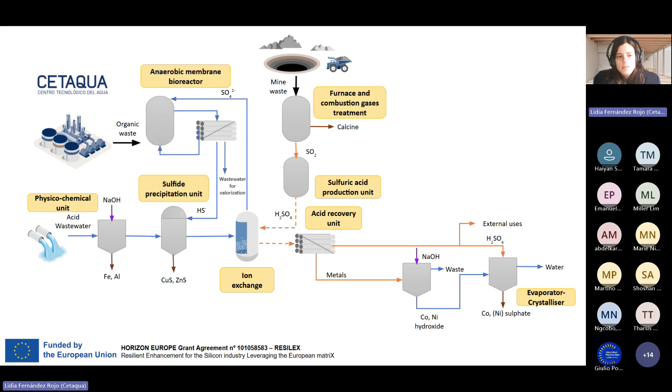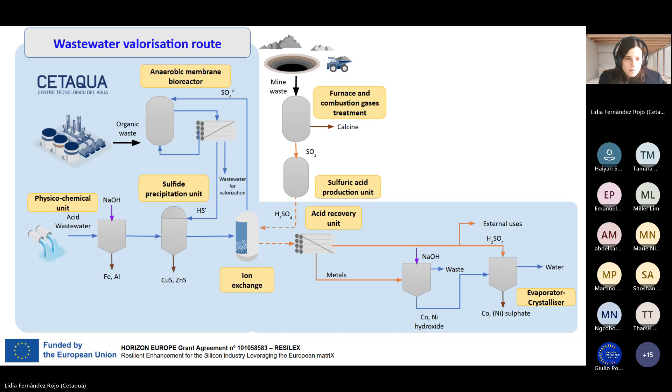So here I will first explain the innovative circular treatment train. This is the whole treatment train where we treat from one side acid wastewater and from the other side mine waste. But in my presentation, I will focus on the wastewater valorization route that is composed of 6 different units. I will go one unit at a time, reviewing the main results of each one. And then Tharsis Mining will explain the main results on their 2 units for valorizing the mining waste.

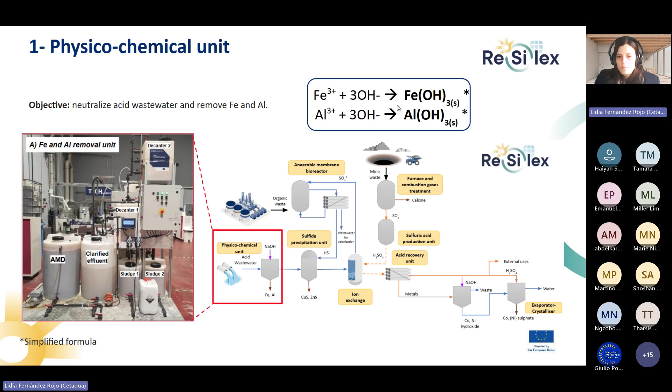And the water we treat in that case, as you can see, exhibits an acid pH, has a high sulfate content, on average 40 grams per liter, also high iron and aluminum content, so iron about 2 grams, aluminum about 0.4, that we remove in that step, and also has valuable compounds like zinc, copper, cobalt, and nickel that we will recover through the whole treatment train.

So in this first step, what we did is that we wanted to optimize the iron and aluminum removal while avoiding the co-precipitation of other metals like cobalt, nickel, copper, and zinc. So we did first pre-commissioning studies in the lab, and we determined the optimal pH for that, and it was 4.5. Also, we did tests with the pilot before starting the treatment of the whole water, and we determined that the optimal residence time would be 2.2 hours.

In the whole operation, what we achieved is an average of more than 99% and 85% iron and aluminum removal at pH 4.5. However, we observed an undesired removal of copper in the sludge, and a minimal removal of cobalt, nickel, and zinc, which was good news since we wanted them to remain in solution.

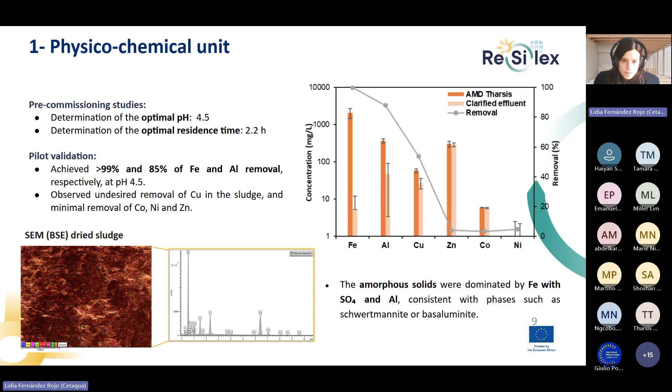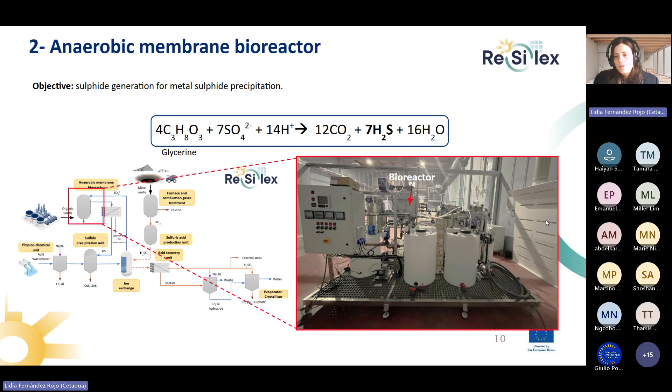You can see here the pilot. It was a compact pilot with other units inside that I will explain later on. For the results, we operated the pilot successfully for 260 days in 4 different phases, where we modified the chemical oxygen demand and sulfate ratios.

The first phase consisted of the culture enrichment, where we worked in batch with a synthetic inlet water. Then in phase 2, we worked in continuous mode with synthetic inlet water. Then for phase 3, we worked in a circular treatment loop, which means that we were using as inlet sulfate the same sulfates that are contained in the acidic mining waters from Tharsis. They are not synthetic anymore. And then in phase 4, we treated synthetic inlet again, but with higher sulfate concentrations.

So we achieved on average, I would say, 70% sulfate removal, but we reached up to 95% in phase 2. We measured a maximum dissolved sulfide of 300 milligrams per liter in phase 3 and removal rates up to 4.7 grams per liter per day, with an average of 1.4 grams per liter per day for the whole operation.

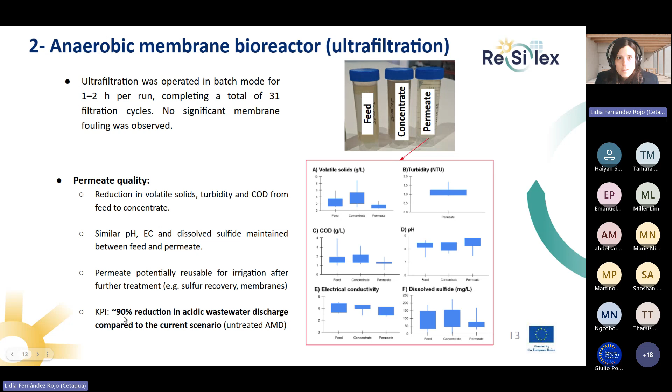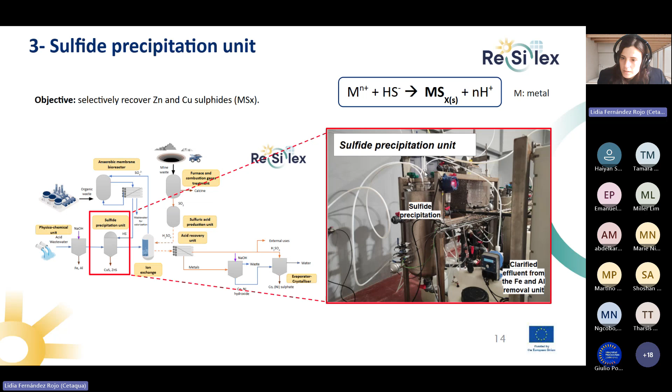We performed different tests at different hydraulic retention times, different pH and different sulfide concentrations. We know these reactions are fast; they are not kinetically controlled. But we tested hydraulic retention time because it has an effect on the mixing of the two solutions in the reactor. So in the end, the hydraulic retention time and the mixing effectiveness have an effect.

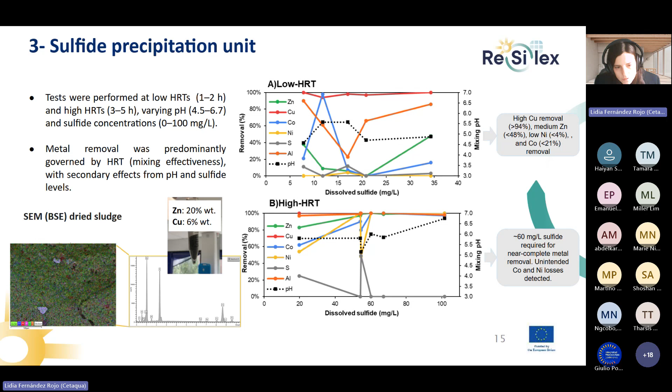If we want to work further on that, probably we will need to work with a high hydraulic retention time, but with a higher sulfide dose and keeping the pH about 5. We also analyzed the sludge from here, and on average it contained about 20% of zinc and 6% of copper in the form of sulfides.

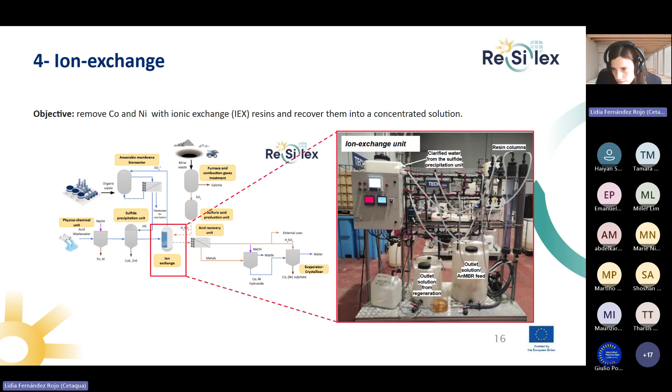The outlet of this sulfide precipitation unit went to the ion exchange, where the ion exchange resins preferentially retain cobalt and nickel. The objective was to recover them afterwards with sulfuric acid in a concentrated solution. Here you can have a look at the pilot we used for that, and here you can see the resins that we used.

Each operation cycle is formed by 3 steps. First, there is the metal retention, where you treat the water and metals are retained onto the resins. Then there is the pre-elution, where you remove hardness, for example calcium and magnesium retained on these resins. And then you do the final elution with a concentrated acid to recover cobalt and nickel.

Here you can see the results of 2 of the experiments. So in all of the cases, we retain more than 90%, 95% of cobalt and nickel. However, we did not reach the saturation in any of the cases. And what we observed is that with the employed resins, we achieved 2.2 milligrams of cobalt and 0.9 milligrams of nickel per gram of resin.

And we also see that there was retention of other metals here, zinc, iron, and copper, that were probably not efficiently removed in the previous steps. So they were competing for the retention on these materials here.

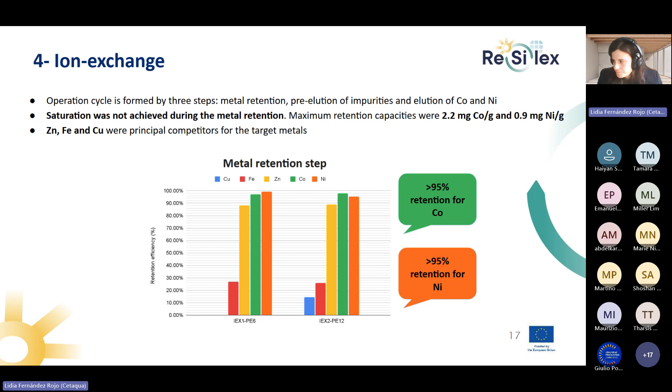And then the next steps were the elution experiments, where we work with different pre-elution volumes, 6 to 12, one bed volume corresponding to 0.5 liter, and different acid sources. So we tried either commercial acid or acid from Tharsis Mining. You can see here the elution efficiency and the recovery of cobalt and nickel.

So what we observe is that once we work with longer pre-elution steps, with 12 bed volumes, it decreases impurities in the final elution solution, because we remove calcium and magnesium before, but it also increases cobalt and nickel losses. This is why the recovery of cobalt and nickel here is lower than in the experiment on the left, where we work only with 6 bed volumes of pre-elution.

Here in these 2 experiments, we reach between 97 to 80% recovery of cobalt, and we concentrate cobalt about 80 to 87 times, and we obtain a final solution with 0.2 grams per liter of cobalt and almost 0.1 grams per liter of nickel in the eluate.

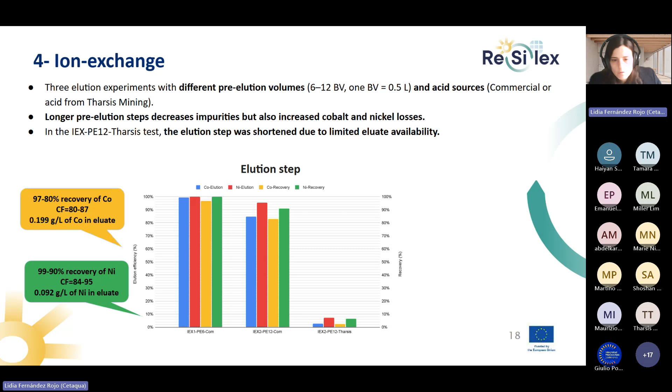Then the next step is the acid recovery unit, which consists of a nanofiltration. So the eluate from the ion exchange goes to this membrane, and here the objective is to concentrate cobalt and nickel in the concentrate stream from the nanofiltration and recover sulfuric acid in the permeate, because keep in mind that this exhibits an acid pH below 1, and under these conditions, sulfuric acid is in the form of bisulfate, which has 1 negative charge.

So it is not rejected by the nanofiltration membrane, so it can permeate. And this is the way we can recover sulfuric acid in the permeate. And the membranes employed here are special for supporting acidic pH.

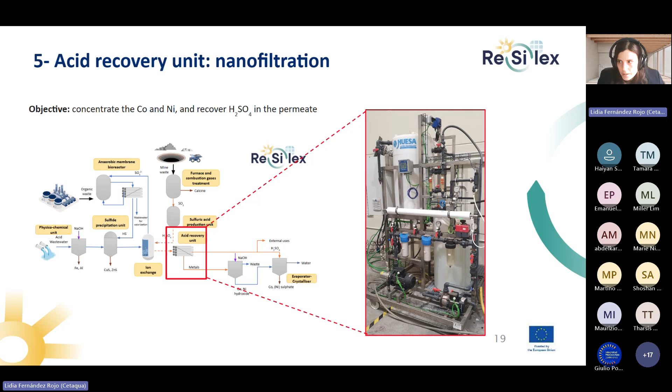Here we operated with synthetic solutions because the amount required for this pilot, as you can see, was kind of medium, so it required 200 liters for working, and from the elution of the previous step we recovered 3 liters instead of 200. So we work with synthetic solutions, and each run had a duration of 2.5 hours.

And here you can have a look at the cobalt and nickel concentration factors and concentrations in the beginning, so in the feed and in the concentrate. And of course, in the permeate, we cannot see them because all the cobalt and nickel went to the concentrate. So at the end, we increase the concentrations ninefold for cobalt and nickel.

And sulfur, which is not here because it was out of range for this plot. So what we saw is that it largely permeates as bisulfate, and we recover sulfuric acid at a concentration of about 0.9 molar that was suitable for reuse for other purposes.

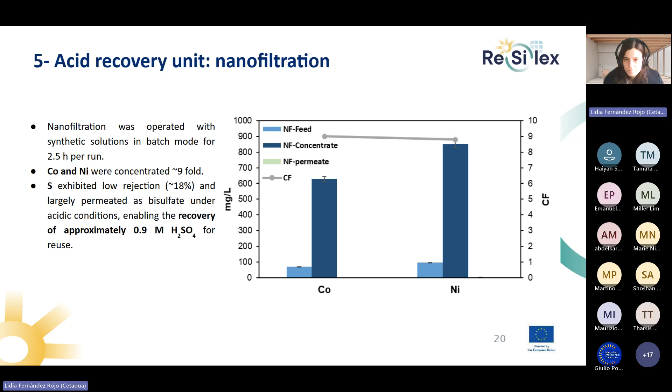And then the last step of the wastewater valorization route consists of an evaporator crystallizer. And the objective is to concentrate cobalt and nickel and recover the metals in the form of crystals. Here you can have a look at the setup. So first we work with addition of caustic soda to first concentrate the metals as hydroxide, then redissolve them with sulfuric acid, and then it went to a rotary evaporator.

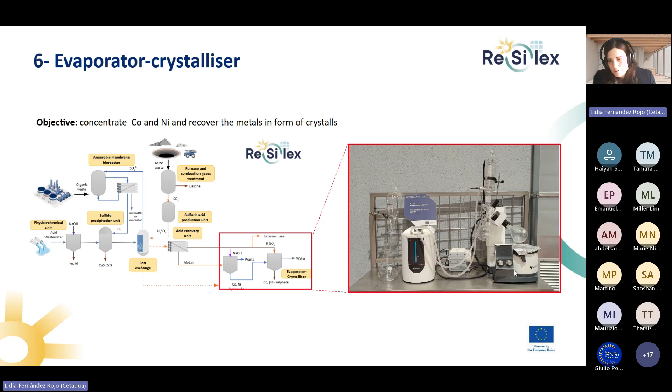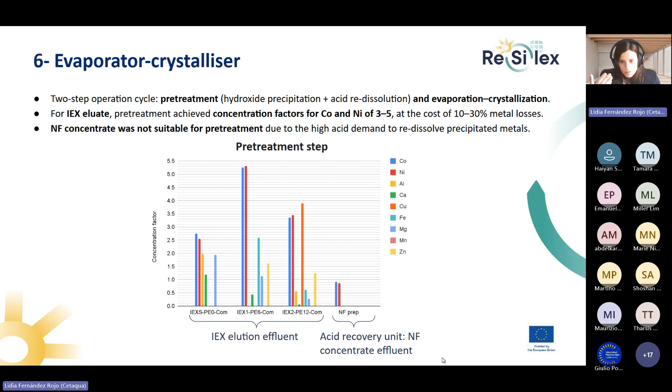And when we work with the nanofiltration, since this solution is already very concentrated, when we try to concentrate even further with the hydroxide precipitation, we did not manage to reduce the volume of the hydroxide sludge that is formed. So at the end, the concentration factor is lower than 1. It means we lose some of the valuable metals there. So if we are using this acid recovery unit, it makes no sense to employ this pretreatment. You have to go directly to the evaporation crystallization step.

And here we can show the results of the final sludge. With the nanofiltration concentrate without pretreatment, here where you can see my arrow, we reach a higher cobalt and nickel recovery, and we obtain a crystal with almost 18% of cobalt and almost 6% of nickel in the crystals, which were in the form of cobalt and nickel sulfates, different hydrated sulfates.

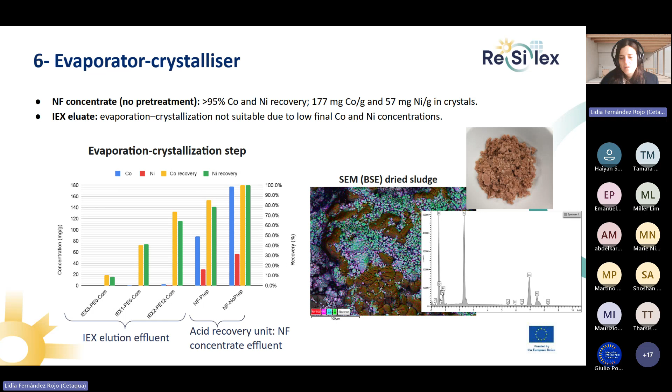And then when we use the ion exchange elution effluent, what we saw is that cobalt and nickel concentrations are much, much lower because they were not concentrated enough for these steps. So at the end, we did not obtain a valuable crystal. From this, we thought that it is important to use the acid recovery unit, so not to skip that point, because it is really helpful to concentrate the metals further.

And then we also calculated the operational expenditures of all the different units. We calculated it with two different units, as euro per cubic meter of acid mine drainage and euro per kilogram of valuable metals, considering valuable metals as copper, zinc, cobalt, and nickel. What we see here is that some of the units have a high cost, like the anaerobic bioreactor, but there are some units that have a negative cost, which means that there are revenues from selling these valuable metals, which is really important in the evaporator crystallizer.

Cobalt and nickel have a high value revenue, so it can help to compensate the cost of the rest of the units. So at the end, the mining company has to pay. The selling of the metals does not compensate enough for the rest of the operational expenditures, but at the end the price would be 3.35 euro per kilogram of valuable metals or 1.24 euro per cubic meter of acid mine drainage, and it is way better than the conventional treatment with lime addition, which, including the managing of the waste, could be around 4.12 euros per cubic meter.

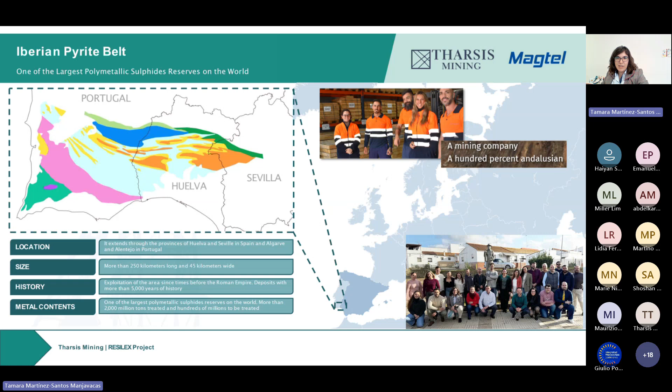Since November 2018, the company has carried out an intense evaluation of the mineral resources, carried out around 200 drill holes between 2020 and 2022, accumulating more than 76,000 meters drilled and analyzing more than 23,000 samples here in Huelva.

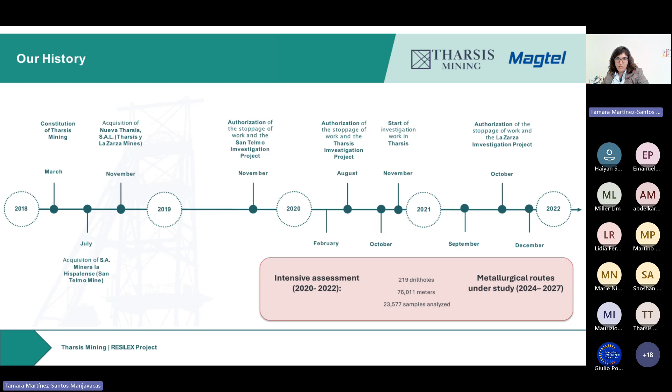In 2024, Tharsis Mining began experimenting with different metallurgical routes to improve the recovery of copper, lead, zinc, gold and cobalt. Recent studies have confirmed the continuity of mineralization at depth, and significant mineral resources have been identified. For the project, a total of 3,000 liters of water from Filón Norte was sent to Cetaqua for testing.

Regarding the experimental setup, this innovative treatment has been divided into 2 stages: furnace and combustion treatment, and sulfuric acid production unit. The first objective is the thermal oxidation of solid waste to produce sulfur dioxide, and Tharsis prepared an analysis sample from the extraction and the industrial sections.

For this stage, 50 kilograms of material waste were prepared and characterized in terms of dry weight, moisture content, density, and elemental composition. The material was crushed in a jaw crusher and reduced to a particle size of 2 millimeters. Moreover, it was ground in a ball mill, and after that, batches of 200 grams were taken and pulverized in a pulverizer mill for chemical characterization to a particle size of 75 micrometers.

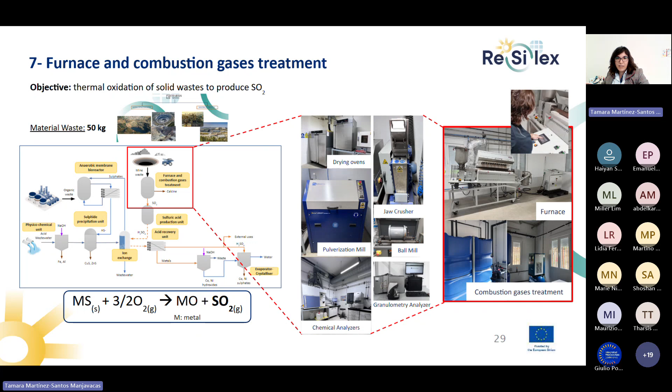This is the furnace that you can see in this picture, and the combustion gases treatment installation with cooling, filtration, purification, and extraction gases stages. The operational plan was focused on 3 lines: water cooling, hot gas to safety vent, and tempered gas to the acid plant circuits, in which several leak tests were carried out prior to commissioning.

After that, Tharsis Mining tested the final assembly with low sulfur content in mining waste from Tharsis, then continued the experimentation with high sulfur content around 40% weight by weight. Regarding the commissioning phase, several tests have been carried out at different inclination and rotation speeds in the furnace to present the experimental residence time data with a total feed rate of 1 kilogram per hour and a bulk density near 4 tons per cubic meter.

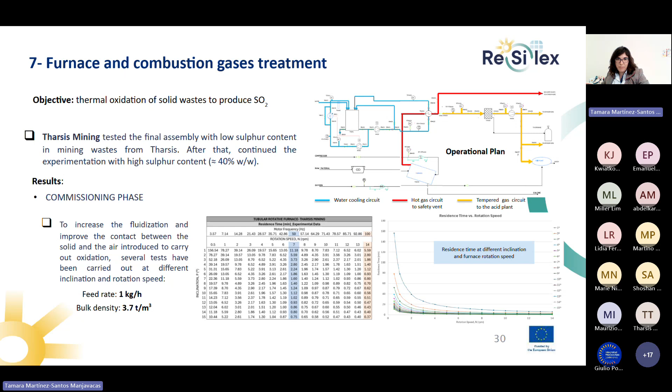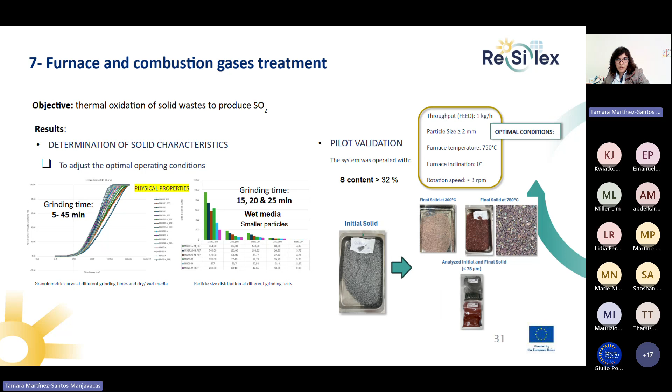The second stage is the sulfuric acid production unit, in which sulfur trioxide is synthesized from sulfur dioxide and dissolved in water through a contact process to obtain sulfuric acid. To meet Cetaqua's requirements, 3 acid production plants were installed here in Tharsis Mine.

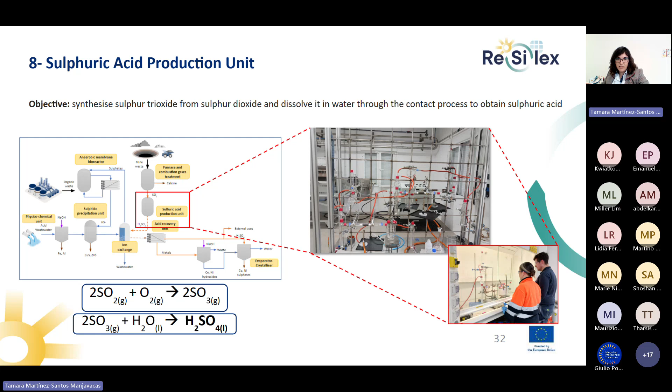The integration tests were essential to demonstrate the stable operation of the combined furnace and acid plant configuration, and to assess its ability to produce acid from the roasting gas. During the experimental campaign, 11 independent sulfuric acid solutions were used for calculation and to evaluate process reproducibility. In this table we can see that the sulfur content decreases by more than 50% between the feed and the calcine, corresponding to a sulfur trioxide conversion efficiency near 30% in test number 10.

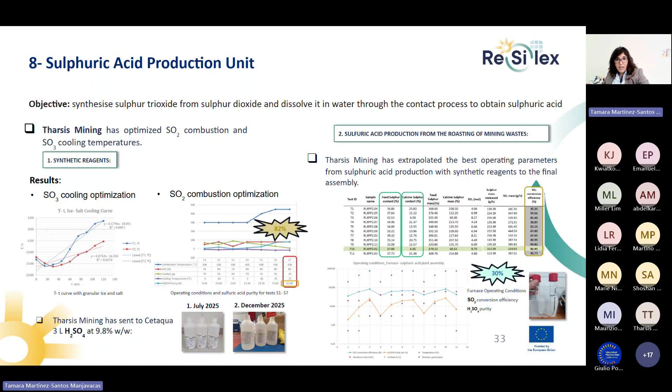So, after installing an additional scrubber tube containing 3 molar sodium hydroxide in series, the sodium sulfate fraction decreases to 25% and the sulfuric acid purity increases to approximately 40% weight, which was the maximum sulfuric acid concentration achieved. These results highlight the alkaline tail gas scrubbing stage as a key optimization point and indicate that multi-stage scrubbing can improve overall sulfur recovery and support future scale-up.

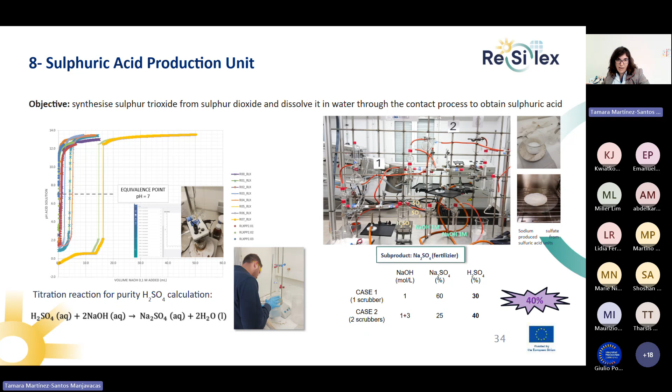We think that the OPEX reduction could be achieved through heat recovery from furnace combustion gases, an industrial scale oxygen supply, energy efficient acid cooling alternatives, and the optimization of the air and oxygen feed control at another scale.